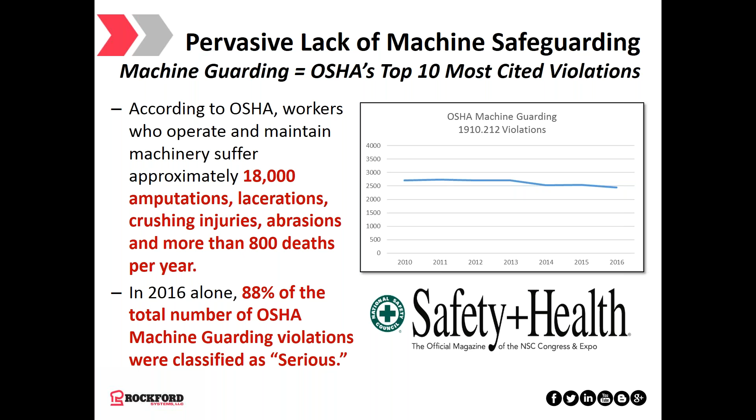In 2016 alone, 88% of the total number of OSHA machine guarding violations were classified as serious, meaning one in which there is a substantial probability that death or serious physical harm could result, and the employer knew or should have known of the hazard. So really, after a decade of dismal improvement, we need to make machine safety a higher priority. Having been on thousands of machine surveys, we estimate that an alarming 50% or more of metal fabricating machinery in the United States do not comply with the critical safety requirements for guarding outlined by OSHA and ANSI.

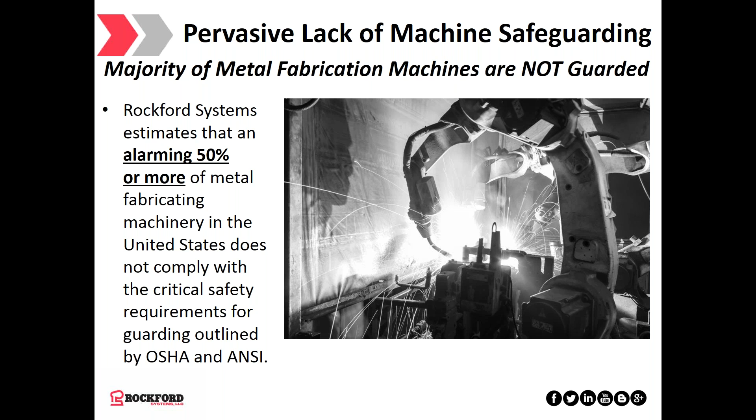So without further ado, I'm going to go ahead and turn this over to Roger Harrison, who will take you through the top 4 machine safeguarding myths. Thank you. Good morning. My name is Roger Harrison. I'm the Director of Training for Rockford Systems. So for the next 40 minutes or so, we're going to go look at the common myths on the subject of machine safeguarding with an emphasis on the regulatory side of things.

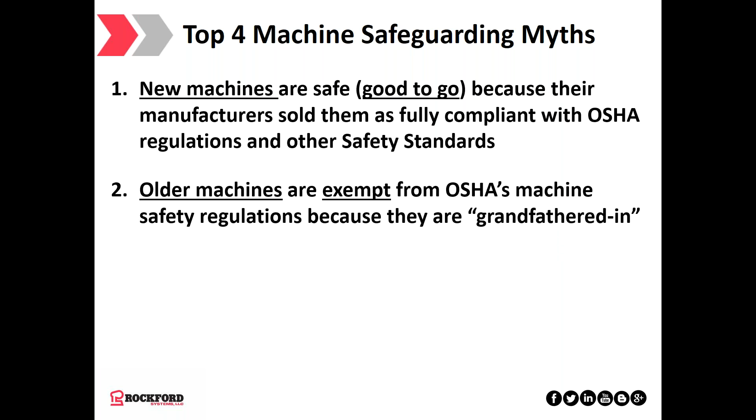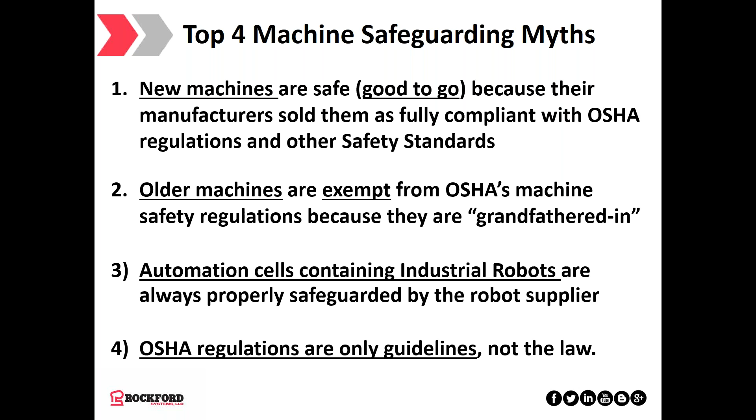Number 1, new myths. New machines are safe or good to go because their manufacturers sold them as fully compliant with OSHA regulations and other safety standards. Myth 2, older machines are exempt from OSHA's machine safety regulations because they're grandfathered in. 3, automation cells containing industrial robots are always properly safeguarded by the robot supplier. And 4, OSHA regulations are only guidelines, not the law.

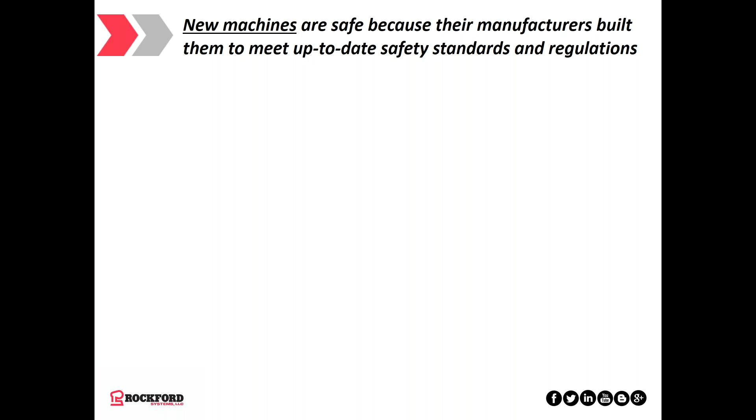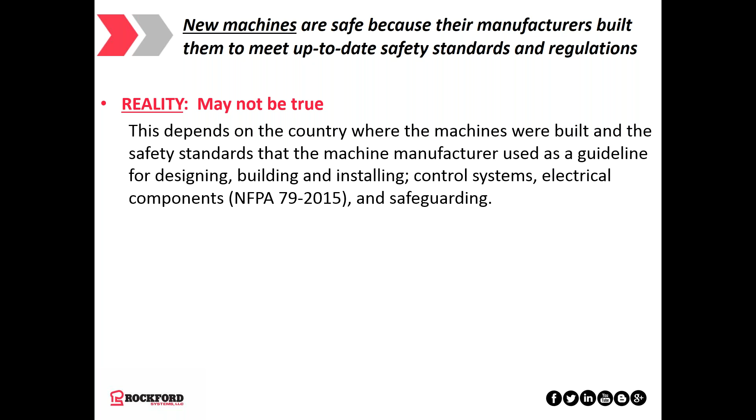So, Myth number one, new machines are safe because their manufacturers built them to meet up-to-date safety standards and regulations. Well, it depends on the country where the machines were built and the safety standards the machine manufacturer uses as a guideline for designing them, building them, installing them, and the control systems along with the electrical components. Keeping in mind NFPA 79, 2015, which is the electrical standard for industrial machinery, which does not get as much press as NFPA 70E that deals with the arc flash issues. Also depends on the machine's safeguarding expertise on the company supplying the machine, the OEM. Some are more comfortable with that than others. Two, the OEM's reluctance to add safeguards to the machine project's cost, because it does cost, whatever way you're going to safeguard it.

And three, the OEM's concern about liability of providing safeguarding, whether they want to do that or not. I heard one press manufacturer a few years ago say, well, we provide presses, and essentially a press is just a big powered hammer. It's a general purpose machine. A lot of different things you can do with the same machine depending on the tooling and the parts you're making.

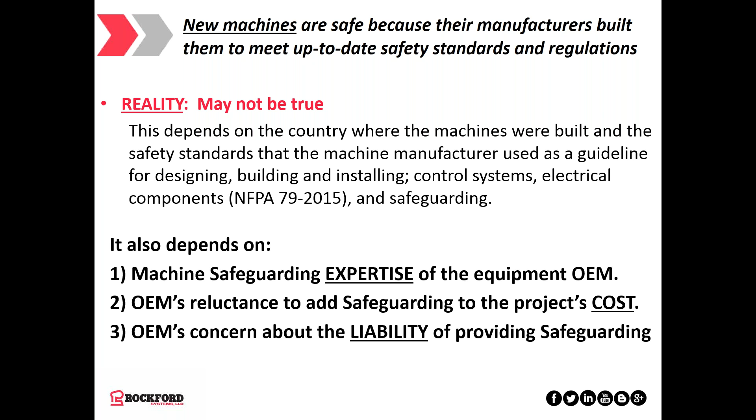So they hesitate to provide safeguarding for that reason. Now that's changing somewhat because Asian and European manufacturers of machines have for some time now provided their machines fully safeguarded. So American manufacturers look at theirs and say, well, we have to offer safeguarding at least as an option, if not a standard feature. So the attitudes are changing.

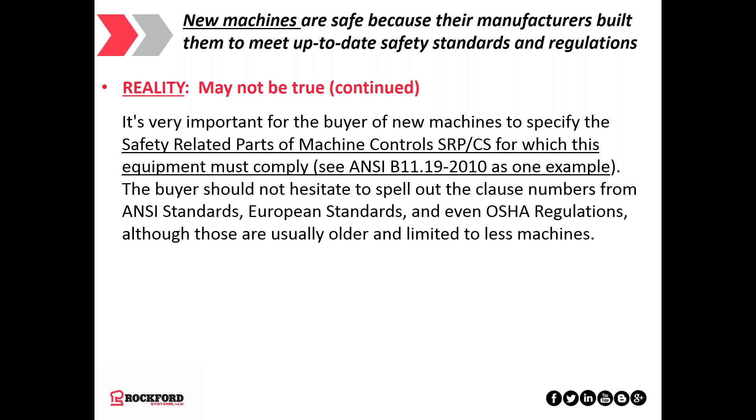It's important when you bid spec new machines to specify the safety-related parts of machine controls, abbreviated as SRP/CS, for which the equipment has to comply. One of those references would be ANSI B11.19 2010. Don't hesitate to spell out clause or paragraph numbers from these standards as opposed to just saying this machine has to meet all federal, state, local safety guidelines, blah, blah, blah. You really need to spell them out, and I think that's what a class like this will help you do.

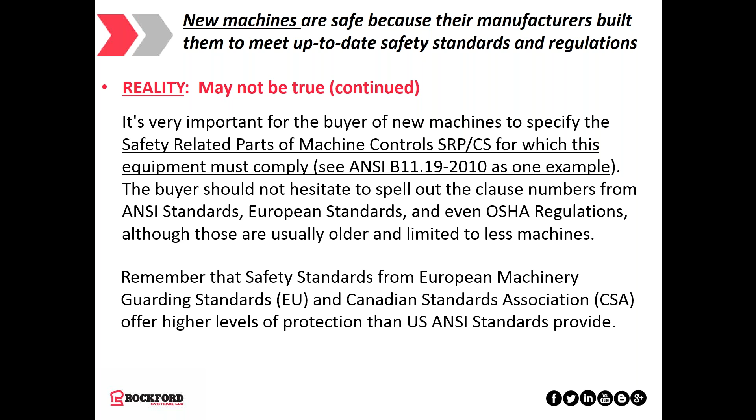Remember that safety standards from European Machine Guarding Standards, or EU standards, along with Canadian Standards Association, CSA, often offer higher levels of protection than U.S. ANSI standards do. So every time they update U.S. ANSI standards, they take more and more from the European machinery guarding standards to hopefully harmonize our standards to eventually meet theirs.

Here's an example of a new drill press that we needed to add some things to make it compliant with ANSI B11 on drills and mills, along with that electrical standard for industrial machinery I mentioned before.

Now you can see here at the top that we added a magnetic motor starter to give us dropout protection, also known as anti-restart. Well, what's that mean? If you lose power while the machine is running, 15, 20 minutes later the power comes back, you don't want any surprise restarts until you go back to the main motor start button. That's anti-restart. How do you know if your motor starter has that feature? Well, usually a spring-loaded start button indicates that, as opposed to a mechanical click that they had on older manual motor starters.

We've also added a red emergency stop button. Notice it's a red button with a yellow background and a manual latch feature, so when you push it down, it stays down. You've got to give it a quarter turn clockwise to reset it before you can go back to the regular machine controls, which in this case would be the on button, to restart it.

Second thing we've added to this is a shield to help control chips and coolant. So the shield actually supplements your personal protective equipment in directing the chips where you want them to go. This particular shield is electrically interlocked. You can see the interlock switch over on the left side here, so when you swing it out of the way, it either prevents or stops the motion of the machine.

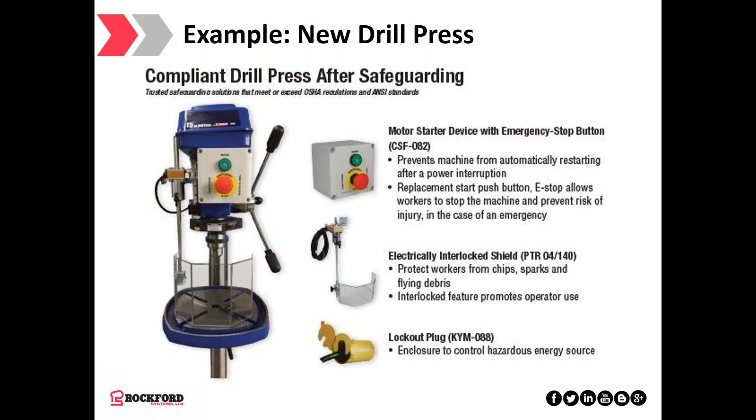We've done similar things here with this mill-drill combination as far as electrical requirements. And you'll notice the shield, this rounded curvature shield here, gives you a wider field of view, better visibility than smaller shields would do. It's also electrically interlocked. We've done some of the same electrical updates we discussed in the previous slide. You can see them over here. And the same thing goes with the lockout plug.

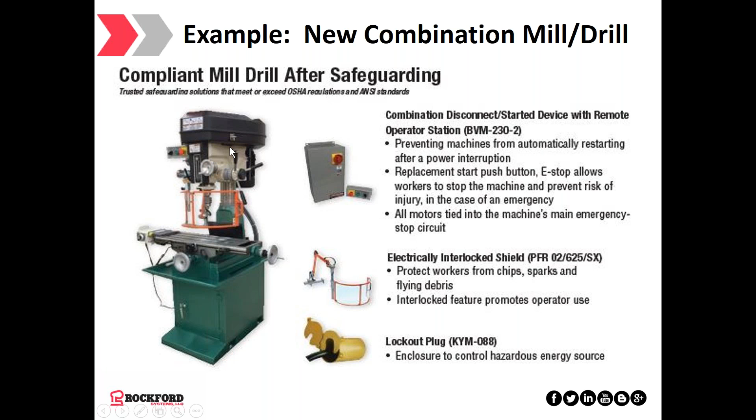Chip coolant hazards are addressed in OSHA's 1910-212, where they talk about flying chips and sparks as one of the recognized hazards you need to deal with.

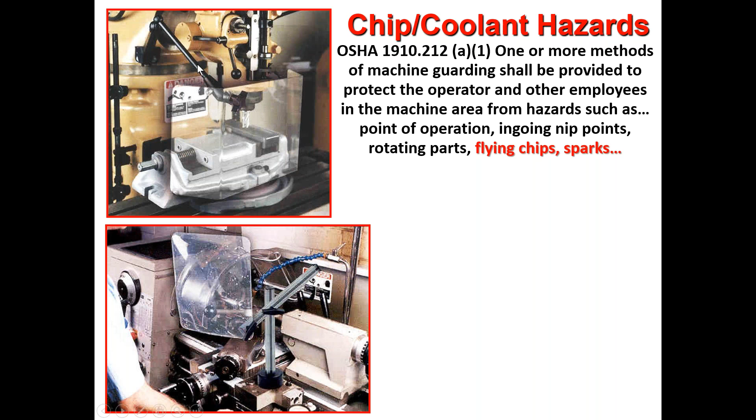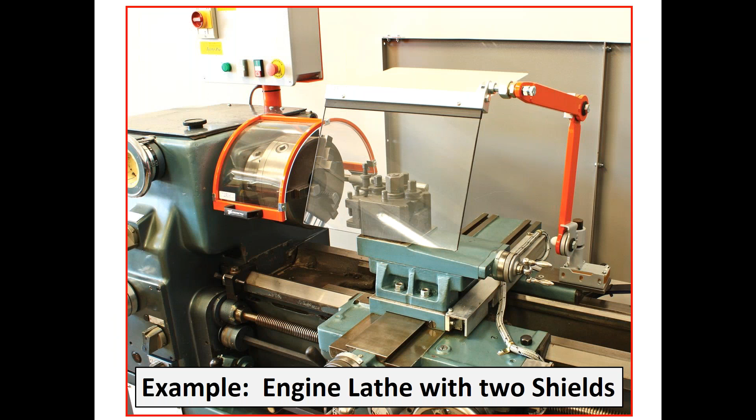Here's an engine lathe with two different shields. The one on the left is a chuck shield to prevent you from getting entangled in the rotating work holder, because remember, these machines have a lot of torque. So if you get wound up in these, they can create some pretty gruesome injuries. Even though that shield is not considered a guard, as we'll talk about later, it's really the most common thing you see on an engine lathe to prevent inadvertently coming in contact with that rotating chuck.

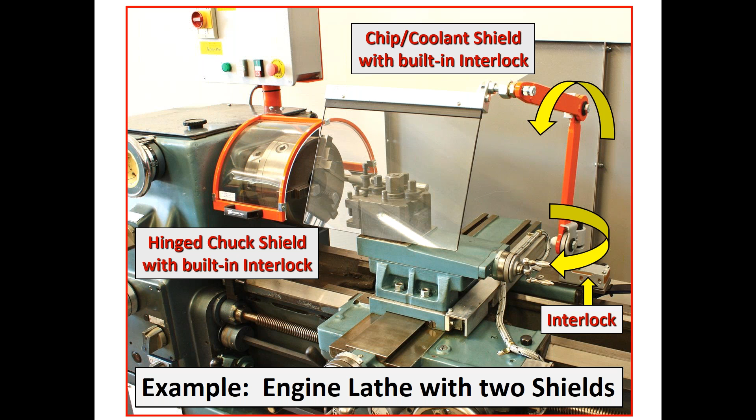It happens to be electrically interlocked, although that's not a requirement here in the U.S. to have an interlocked shield like it is an interlocked guard, which we'll talk about later. Over on the right-hand side, we've got a chip coolant shield, also with a built-in interlock, which has two different axes of movement, as you can see by the yellow arrows. These are actually European designs of shields, because they do include those interlock switches.

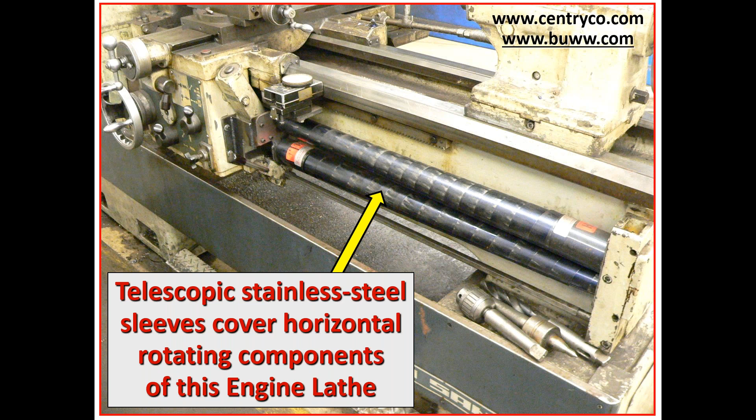Here we're looking at an engine lathe that's been updated with telescopic stainless steel sleeves to cover the horizontal rotating components like lead screw, feed rod, traverse rod, camshaft, etc.

These segments all collapse into the largest segment down on the right-hand side here, so you do lose a little bit of carriage travel. On this end, understanding there's a set of these on the other side that you can't see from this angle. So if that's a 4-inch length on that largest diameter, you're losing 4 inches on both directions. I suppose the reason some companies don't use these is that you lose some carriage travel, and you have to partially disassemble the machine to clean out these shields. So there are some maintenance issues with these, but the sleeves are definitely considered the best safety practice to prevent entanglement with those horizontal rotating components.

Let's look at a couple of stamping presses that we updated for the FabTech show in Las Vegas a couple of months ago. On the left, we've got a servo drive press, which is the newest technology for presses. And on the right, we have a straight side mechanical power press, which a lot of people refer to as a flywheel press. Someplace there up on top, there's a rotating flywheel.

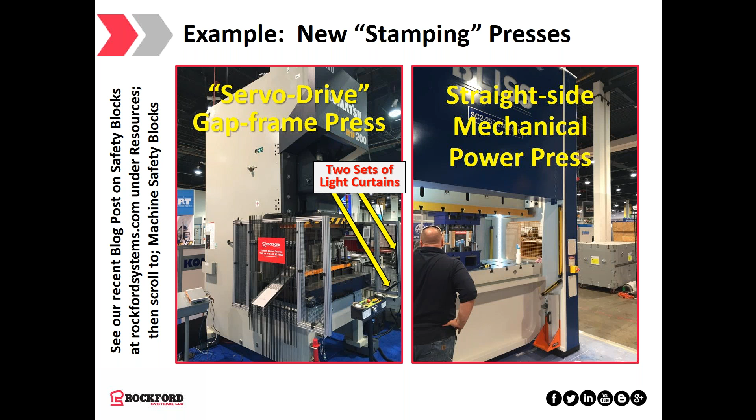For the gap frame press on the left, we've got two sets of light curtains, one vertical and one on an angle to keep somebody from standing in between the vertical light curtain and the machine. Then we've got a set of two-hand controls, which could be considered a safeguarding device if it meets the rules for two-hand controls. You're always better off with a two-hand control than a foot switch, because with a foot switch you don't know where the operator's hands are, whereas with a two-hand control you do. But there is a list of requirements to use a two-hand control as a safeguarding device.

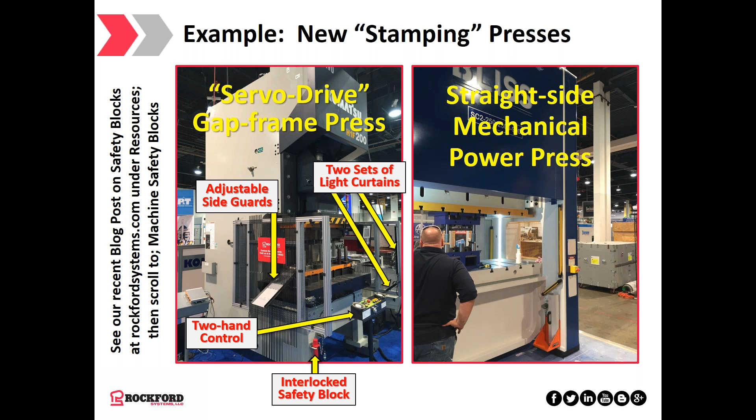Then we've got an adjustable side guard, which allows for different size scrap, presumably, to drop off the left side. And at the bottom, we've got an electrically interlocked safety block. By the way, you may want to see our blog post on safety blocks on our website under Resources, then scroll down to Machine Safety Blocks.

On the right side, we have 3 sets of light curtains we can see from this angle, and I think a 4th one, a little angular light curtain, is hiding underneath the other side. So that's fairly common, to use light curtains on a press this size. And again, we need an electrically interlocked safety block.

Anytime you are adjusting or repairing dies while they're in the press, you need a safety block to prop up the dead weight of the slide and the upper die if the brake or counterbalance should fail. That's the reason to use them. However, safety blocks will not hold back the driving force of the press, so you must have an electrical interlock circuit on these. Who says that? OSHA says you need the safety block, but ANSI says you need the interlock circuit, so that you have to pull the plug to remove the safety block from its holder and wait for the flywheel to coast down before you place it in the point of operation.

Now, while we have this slide up comparing servo drive presses to straight side mechanical power presses, it seems for now that OSHA is putting servo drive presses in the category of a mechanical power press, meaning they fall under 1910-217, meaning they have similar requirements to a mechanical press.

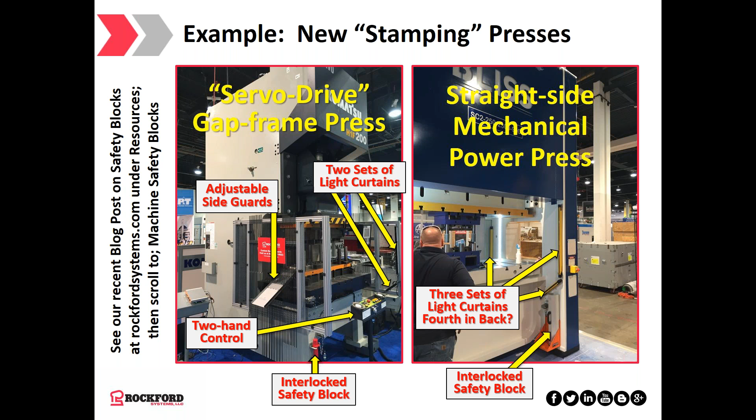Well, if you look at the definition of a servo press, they really don't have the same drive system as a mechanical power press. If you were to Google one of the press manufacturers for servo presses, like, for instance, Komatsu or AIDA, you get a full explanation of how those drive systems work.

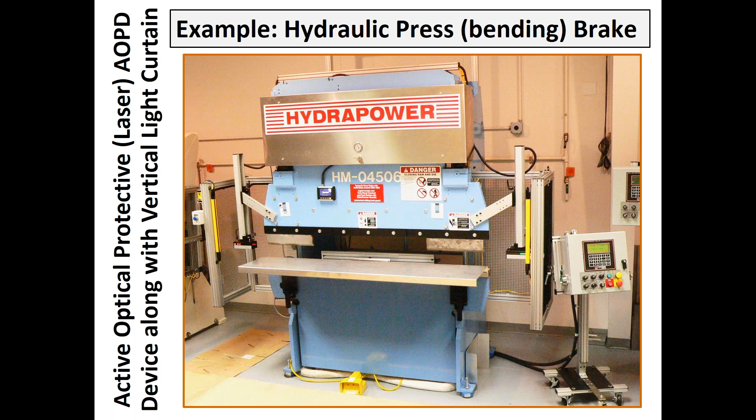Let's take a look at a hydraulic press brake. This is a down-acting machine, meaning the top half moves up and down, which is the most common design of the 42 manufacturers or so of press brakes that are out there.

Now, just one thing at a time, we've got an active optical protective device, also known as a laser device. It was invented around 2001, and if you Google that, you'll find 4 or 5 manufacturers of that type of device.

The nice thing about a laser device is that the operator can handhold the part up close to the die and still be protected, which is a very difficult thing to do with a light curtain because of blanking issues on the light curtain. Now, we do have a vertical light curtain on this machine in addition to the AOPD laser device. The reason for that is the laser device is not capable of handling all different types of dies used in the machine.

Like a compound die is something you can't deal with, as an example. Therefore, the light curtain acts as a backup safeguarding means to the laser device. Is it required to have both devices? No, it's just there as a backup.

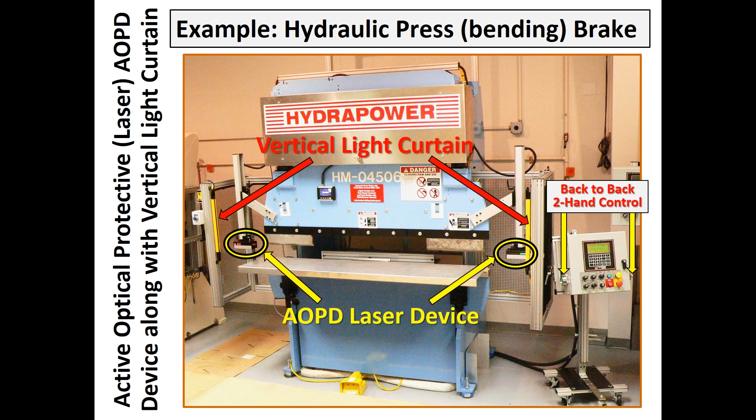Over on the right side, you can see a back-to-back two-hand control, which is something you might be able to use not only for cycle actuation, but as a safeguarding device if you're able to fixture the piece part in place, so the operator doesn't have to hand hold the part during the bend, which is normally what goes on.

Then you've got hinged corner guards, which you can swing out of the way so you can slide your tooling in from the end, which is what's normally required to do that. What you cannot see from this angle is a sliding interlocked vertical guard on the back side, which prevents people from getting in the back of the machine without opening up the interlock on the guard.

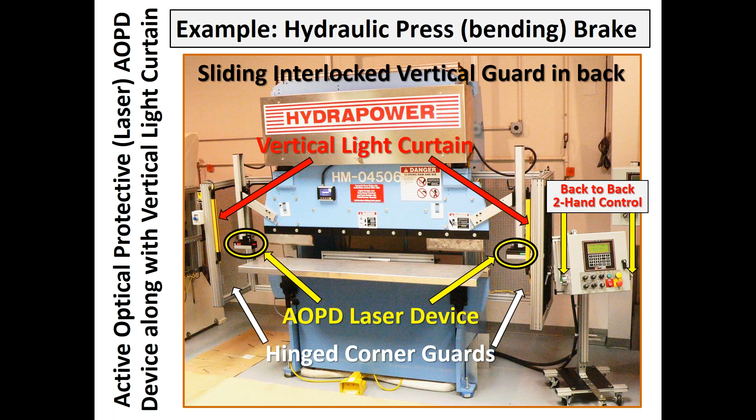So we have several different means of safeguarding on this hydraulic press brake. Keep in mind that laser device only applies to hydraulic press brakes, not mechanical. And there are still some mechanical press brakes out there which you can put certain safeguarding devices on, but a laser device is not one of them.

Now that we completed myth number 1, let's move on to myth number 2, which is that older machines are somehow grandfathered in since they were manufactured before the safety standards and regulations existed. Well, it's logical, but it's not true.

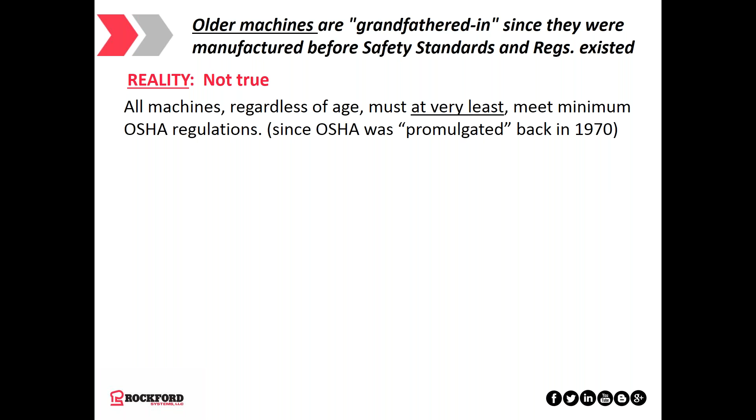All machines, regardless of age, must at very least meet minimum OSHA regulations, which were promulgated back in 1970, and unfortunately they've had very few changes since then. So if you want up to date, you're going to have to go beyond OSHA.

Every 5 years, the writing committees have to either rewrite the standard or reaffirm the standard, which is to accept that standard as is, no changes, if there hasn't been enough change in the technology or they can't get a writing committee together. Or the third option is to drop the standard or combine it with another similar standard, like they did about 20 years ago.

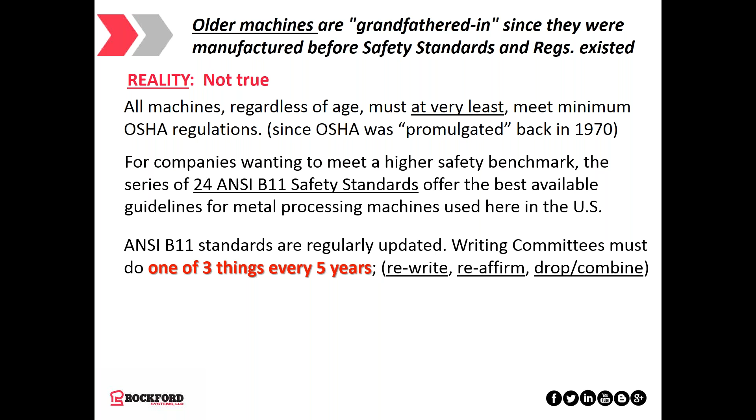With the coil slitting standard, B11.14, they combined that with the cut-to-length line standard, B11.18. Now they call it a coil processing ANSI standard, B11.18. So there's activity every 5 years, which there is not with OSHA regulations.

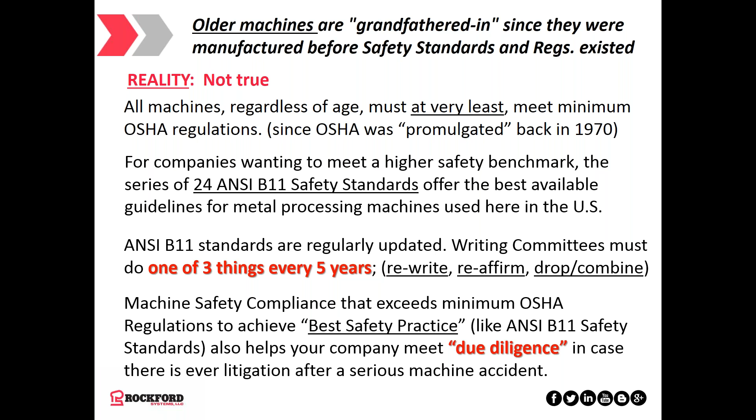So if you're exceeding minimum OSHA regulations to achieve the best safety practice, as is the case by using ANSI standards, it also helps your company meet due diligence in case there's ever litigation after a serious machine accident.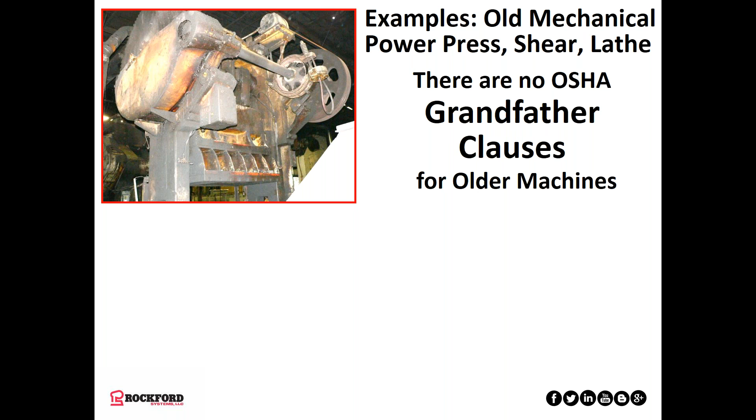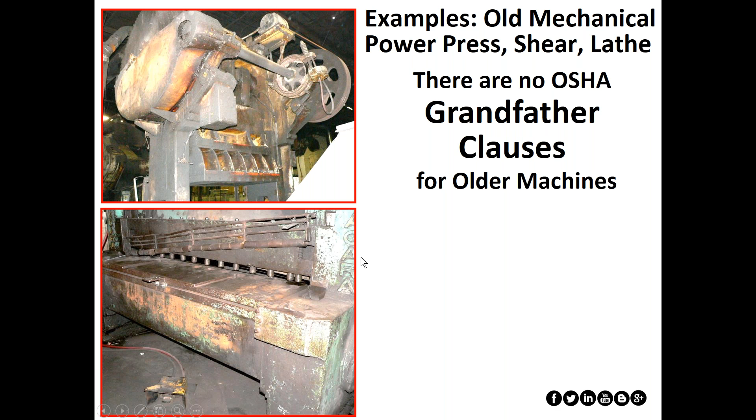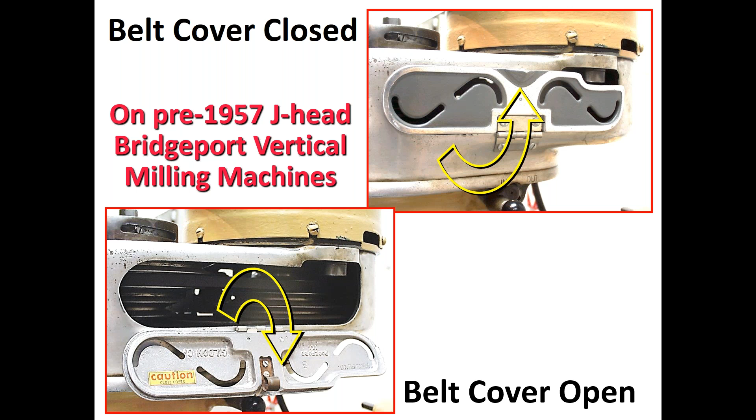Here we've got an old Bridgeport J-head machine, which they made up until 1957, and believe it or not, there's still a lot of these out there that have an opening on the top of the head to change the speed, because this was before variable speed drives. Somebody had to access the belts and pulleys to change the speeds. Well, that's a rotating component hazard under OSHA's 1910-219 and needs a cover.

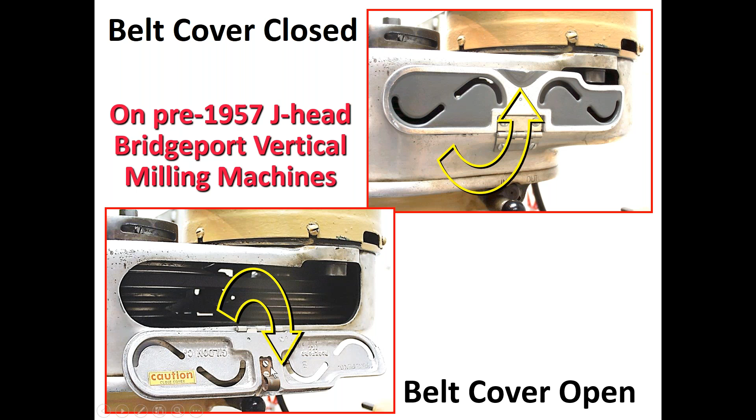And that cover needs to be held closed with a fastener that requires a tool, as opposed to just the spring clip that we've got here. So as you can see, this is custom sized for a Bridgeport. It has holes for heat dissipation, and there's a similar cover on the other side. But that opening does need to be covered.

Here's the second half of that list, and you notice the bottom item here, American National Standards Institute, Robotic Industries Association, R15.06 on robot safeguarding. There's a 99 version of that, which is still current, and the updated 2012 version. We're going to discuss more about that later, and I thought I ought to put them in here because later on we're going to see some examples.

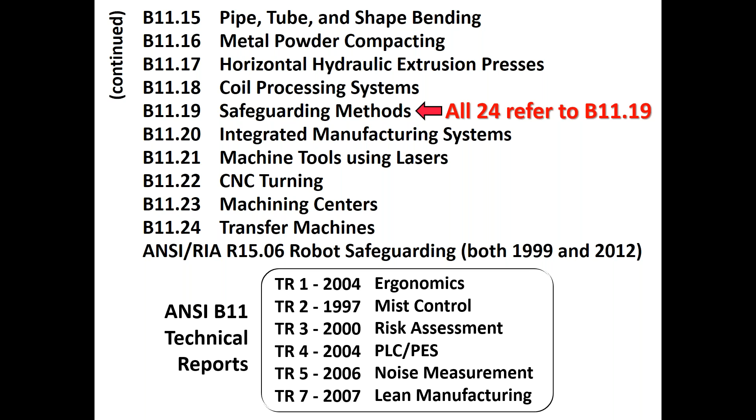There's also B11 technical reports that are published and available from the same sources you get the ANSI standards from, which, by the way, if you Google this, you could look at ansistore.org, techstreet.com, global.ihs.com, or roboticsonline.com for the robot standards. Most of these are around $85, although the robot standard, at least that latest one from 2012, is $325, just to give you an idea. Now, some of these sources offer these as paper copies, others offer PDF files, and some offer both, just to give you an idea.

How about a bench grinder? That's one of the machines that has a machine-specific regulation, meaning a list of do's and don'ts. It's considered a vertical regulation by OSHA, which they pay more attention to.

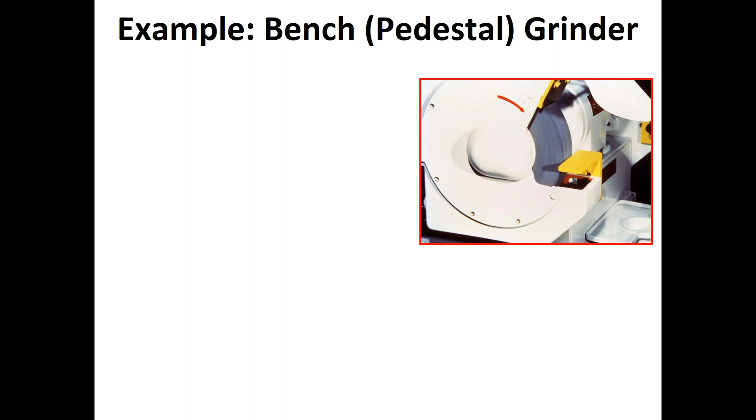What are some of the things you need to do for a bench or pedestal grinder? Well, first you want to ring test the wheel before you mount it to the machine. This needs to be documented, by the way, with the training requirements on that, which means you suspend the grinding wheel by the center hole, tap it around its outside diameter with a non-metallic object like a piece of hardwood to make sure the wheel will ring like a bell tone when you tap it, as opposed to a thud or cracked plate sound you'll get if you've got a cracked wheel, and you never want to mount a cracked wheel.

So ring testing is required by OSHA. They also suggest that you stand aside from that machine for at least a full minute, because if the grinding wheel were to shatter, it usually happens within the first minute. So that should be part of your safety training with grinders.

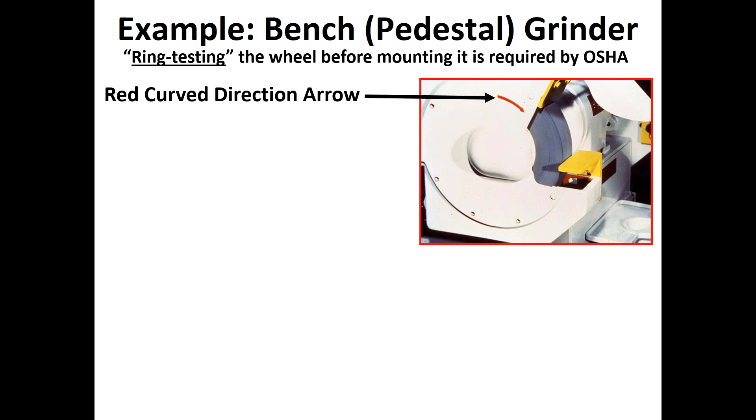The red curved direction arrow is usually for larger diameter grinding wheels, like maybe 18 inches or more in diameter, because those are usually used on larger machines that have three-phase power. If you should, during maintenance, disconnect the power, and then when the power is reconnected, accidentally reverse the phases in the motor, of course the grinding wheel would be running backwards, which is very dangerous.

So you need a direction arrow for the larger grinders and the larger wheels. Now the tongue guard, also known as the spark arrestor, can have no more than a 1/4 inch opening where that arrow shows you. You need to cover the wheel with something that also encloses the spindle end and nut.

Now what are you missing on this grinding wheel cover? The bolts. You got to have all the fasteners to maintain the strength and integrity of the grinder wheel cover.

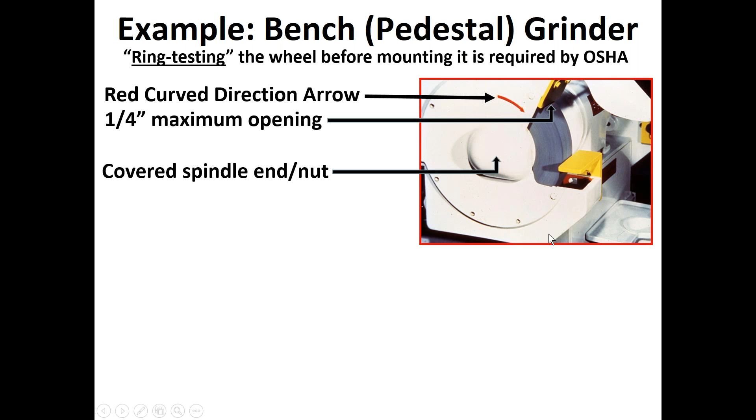So what's the big one with grinders? Well, that would be an 1/8 inch maximum opening between the work rest and the wheel, because the wheel wears down as you grind parts. That is the number 1 machine safeguarding OSHA violation, has been for 46 years since OSHA first came out.

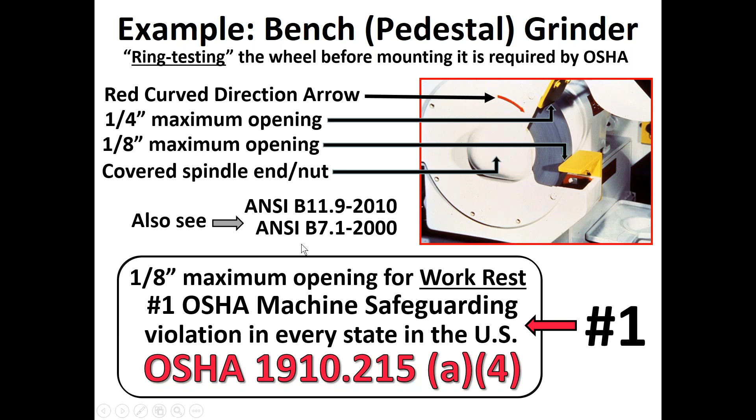So there's the paragraph within 1910.215 OSHA that tells you when you need to use that. And you'll notice there's also a couple of ANSI standards on abrasive wheels and grinders that are very current, and you may want to also access.

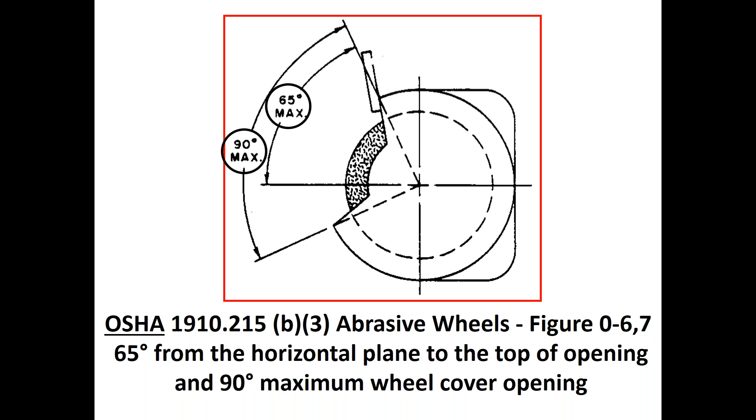By the way, as far as the wheel covers, you cannot cut away a wheel cover to any more than a 90-degree maximum opening. A 65-degree opening between the horizontal plane and the top is also in OSHA, under paragraph B3 if you need to look it up. So 90 maximum, 65 for the area that you're actually using.

I don't think I mentioned on the previous slide that the reason for not cutting open the wheel cover is, if you do - I saw one company that opened up the wheel cover to like 180 degrees - it gives you a wider spread of fragments should the grinding wheel shatter. And when you say shatter, that usually means explode. So that's why those are in OSHA.

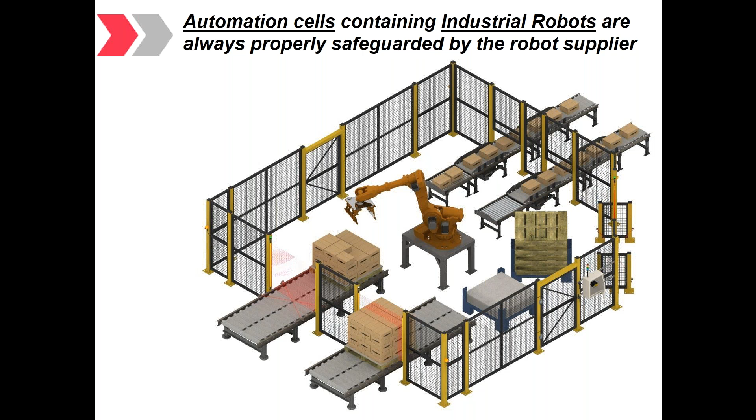So now that we're done with myth 2, let's move on to myth 3, where it says automation cells containing industrial robots are always properly safeguarded by the robot supplier. And sometimes that is true, but not always.

Some of the manufacturers of these machines are not comfortable with the safeguarding, as we mentioned before, so it's left to an aftermarket manufacturer to provide the safeguarding.

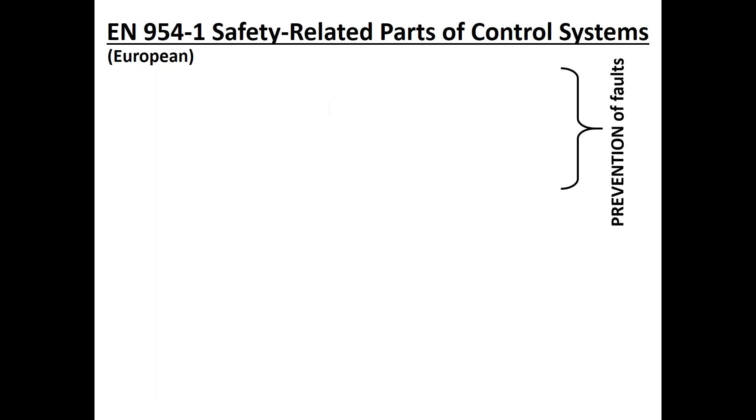Now, we need to consider the European safety-related parts of control systems when we get into this automation system. For the prevention of faults, there's two things: Category B, which are safety-related parts that will withstand the environment, and Category 1, which are well-tried safety components. So these are pretty basic.

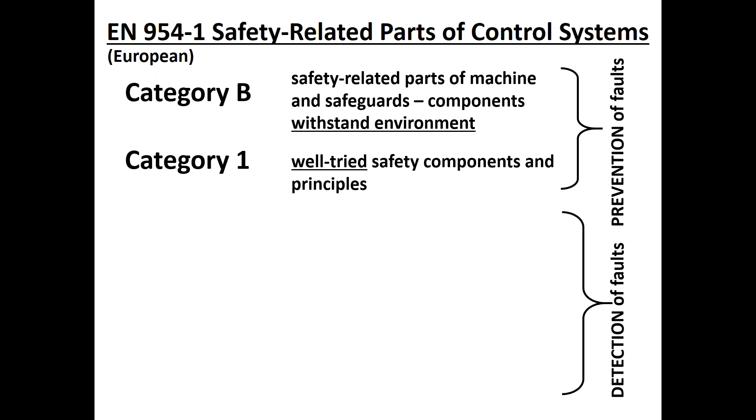Most of our concern would be for the detection of faults, like Category 2, components that are monitored before you start up and periodically thereafter, like, for instance, pressure-sensitive mats or drop probe devices, also known as ring drops or halo devices for spot welders and riveters. Radio frequency antenna would be another one for Category 2. That's a fairly low category of protection.

Your better guard interlock switches would be a Category 3 that are dual monitored, so a single fault doesn't lead to the loss of the safety function. And finally, Category 4 would be your better light curtains out there that are dual monitored with all foreseeable faults detected. So light curtains are not all the same.

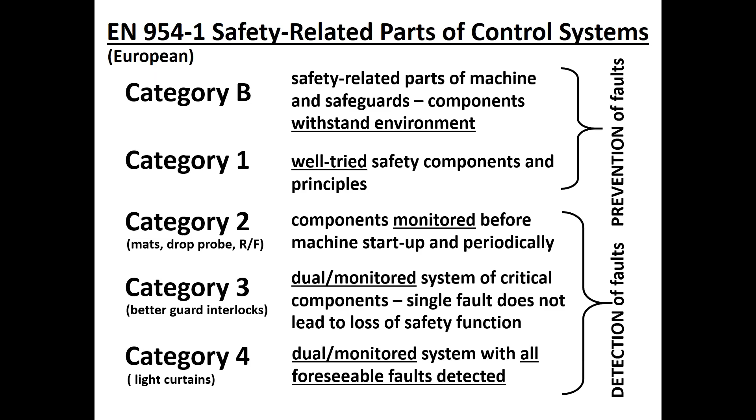If you Google light curtains, you want to make sure you're dealing with a Category 4 light curtain. If you Google guard interlock switches, you want to make sure you're dealing with at least a Category 3 switch. And again, these come from European regulations, but a lot of this has already been incorporated into updated ANSI standards over here.

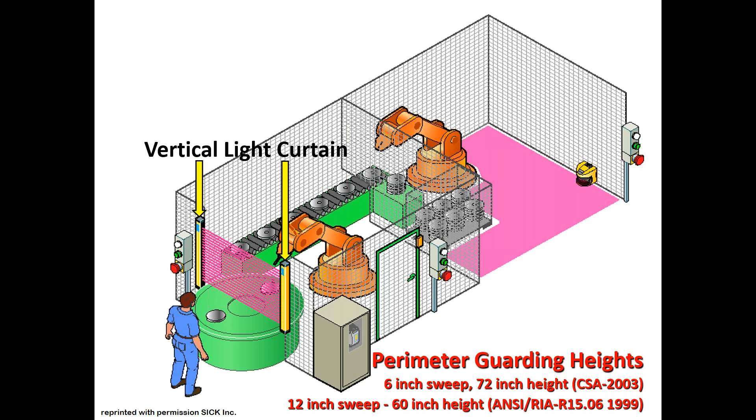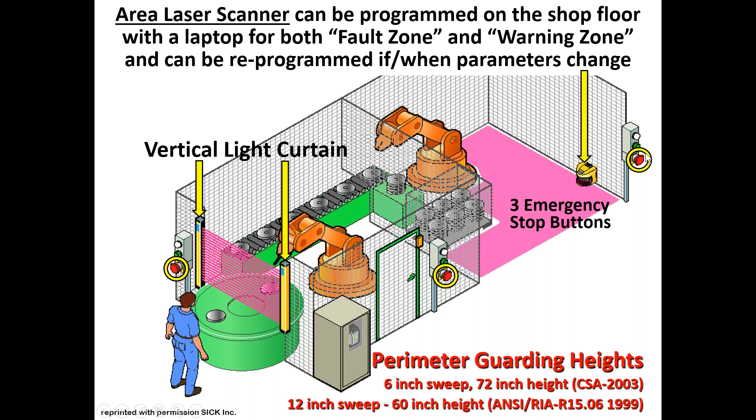We've got a vertical light curtain for the operator's turntable, as you can see. An area laser scanner, which you can program for the L shape that this is protecting, on a laptop computer out on the shop floor. You can reprogram it if your parameters change, which is the nice thing about that. I've got 3 red emergency stop buttons on the left, center, and right, and an interlocked guard door with an interlock switch, along with an output signal switching device. That means if this is running continuously like it's supposed to, because it's automated, and it suddenly stops, you need to know what to check, what tripped, why did the thing stop?

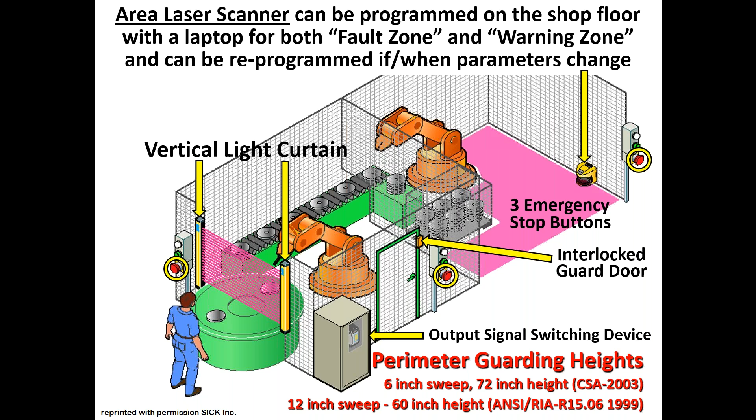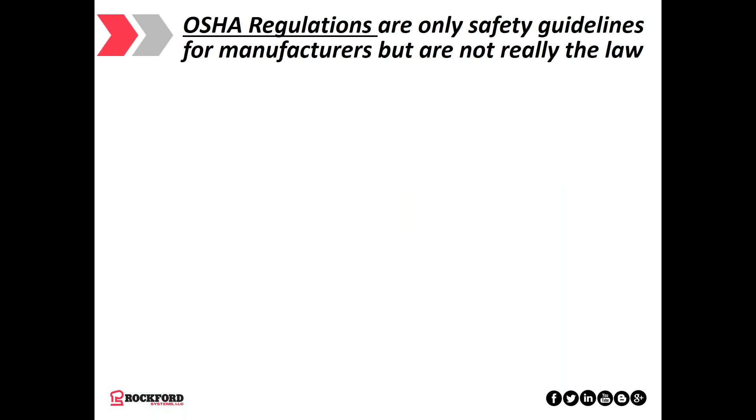That completes myth 3. Let's move on to myth number 4, where it says OSHA regulations are only safety guidelines for manufacturers, but not really the law. Well, no, that's not true.

Never has been. The Williams-Steiger Act, introduced by 2 congressmen from Wisconsin back in 1970, established OSHA. General Duty Clause 5A1 is the employer's responsibility for a safe and healthful workplace, and there's some other things we can take a look at there as well.

All 50 states started out under federal OSHA supervision. Through the years, about 23 states have petitioned to become a state-approved plan. So there's state OSHA plans and federal OSHA plans, but they pretty much go under the same rules.

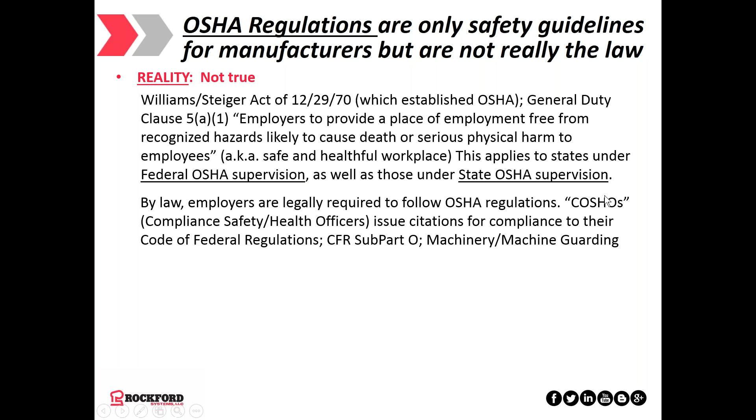So employers are required to follow the OSHA regulations. When they talk about COSHOs, that's compliance and safety and health officers. They'll issue citations if you don't follow the stuff in this CFR. 1910.212 says employers have got to protect the operator and anybody else in the machine area from exposure to recognized hazards using guards, devices, or methods, or some combination of those.

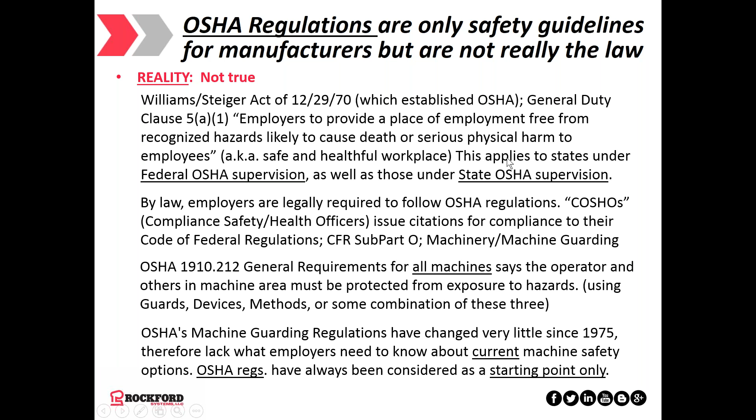Keep in mind, OSHA is well aware of the fact that their machine guarding regulations have changed very little since the 70s. Therefore, if you want to stay current, you've got to go with ANSI standards, because OSHA regulations just have so little that's up to date.

So if you're cited, the best place to go for advice is that B11 series of ANSI standards we've been talking about. Now, B11.19 is the Safeguarding Methods Standard, also known as the Safeguarding Criteria Standard. I think when they update it next year, it's going to have yet a different name that includes risk assessment. But this is where you find the 5 basic methods of safeguarding.

Guards, which could be either perimeter or point of operation guards. Devices, which could be light curtains, laser scanners, and so on. Safeguarding by distance usually involves a large, bulky part that the operator has to hand hold, which theoretically keeps him far enough away from the hazard to prevent him from getting hurt. Safeguarding by location would be the operator's physical location in regards to the hazard area.

And safe opening is currently a 1/4 inch or less. If you've got a machine that doesn't open up more than a 1/4 inch, that may be enough safeguarding because a small finger can't get in that opening. Well, it may or may not be true, because as I understand, they're changing that next year, getting rid of the 1/4 inch opening and just saying no body part can fit in that opening, without actually putting a dimension on it.

In the early years, the ANSI B11 standards had their own safeguarding section in each one, which meant you had to buy copies of all 25 different standards for the machines you wanted to look up safeguarding on. Now, in the B11.19-2010, the safeguarding sections for each of the standards were consolidated into this one umbrella standard, B11.19, for the user's convenience and to prevent them from having to buy all of the standards.

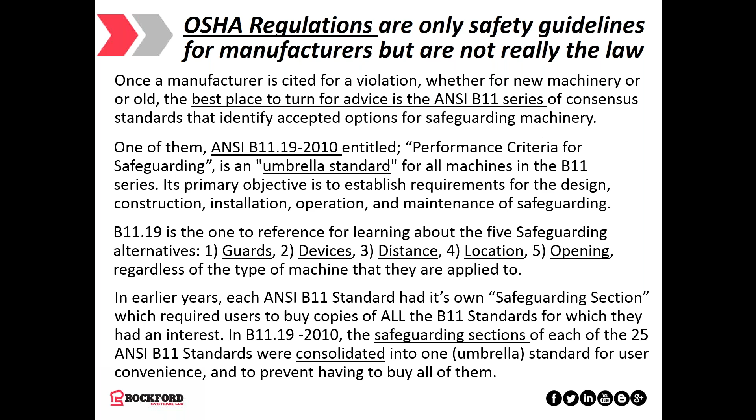So OSHA's 5A1, what's it say in the general duty clause? Employers got to furnish a place of employment free from recognized hazards likely to cause death or serious physical harm.

To operators, employees do have responsibilities here to follow the rules and regulations that apply to their own actions and conduct. I have heard of a couple instances where an employee was trained not to do something that was well documented, but continued to do it, even though it was a very dangerous thing to do.

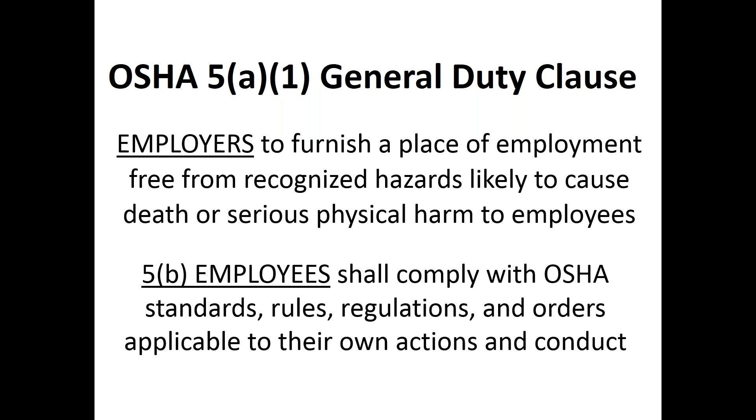Not only did that employee continue to do that himself, but trained another operator to do that same dangerous thing, and that second operator was seriously injured. So, as I understand, OSHA cited the first employee because they considered that egregious or serious enough to justify paragraph 5B, employee citations.

OSHA's 212 requirements under A1 says the employer's got to protect the operator and other employees in the machine area from exposure to hazards, like point of operation hazards, where the tooling comes together to make the part. That's the point of operation, which every machine has at least one. Ingoing nip points, rotating parts, flying chips and sparks.

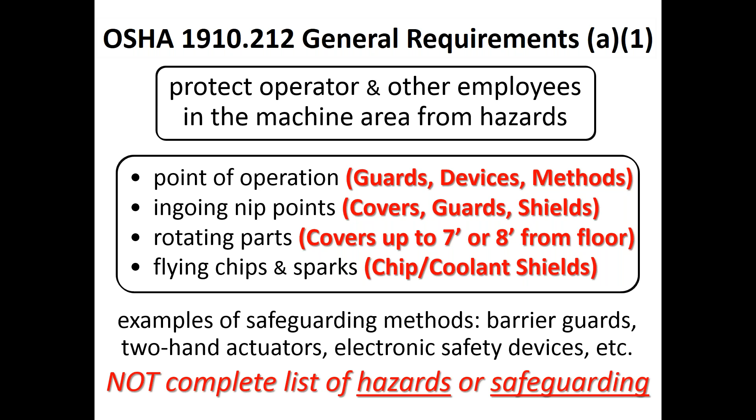So you've seen some examples that are listed over here on the side in red of the safeguarding methods that OSHA lists, but that's not a complete list by any means. That's just some examples from 212A1. So general requirements, 212A3ii says the guarding device should be in conformity with any appropriate standards.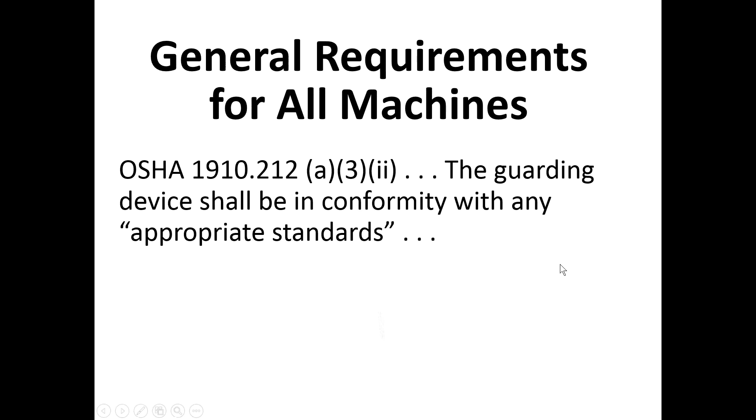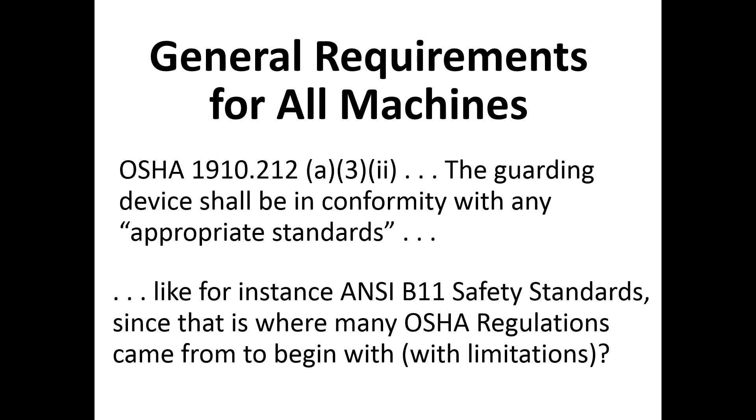Well, what could be more appropriate than the ANSI B11 standards from which these regulations came? There was a window of opportunity for OSHA back in the early 70s when they could take existing ANSI standards and adopt them into their own regulations and rebadge them as an OSHA regulation. But that was only for a few years. That method is no longer available to them, so now to promulgate a new, especially machine-specific or vertical OSHA regulation, it takes an act of Congress.

So, Subpart O, machinery and machine safeguarding. The 6 machines inside the box are considered vertical or machine-specific regulations. What's that mean? Got a list of do's and don'ts for each of them in OSHA.

So OSHA tends to lean towards these machine-specific regulations for citations. Look on the far left side here, you see the 3 arrows? Those are the three that seem to collect the most OSHA citations: 1910-213 for woodworking, 1910-215 for abrasive wheels or grinders, and 1910-217 for mechanical power presses, simply because there are a lot of those machines, I would expect.

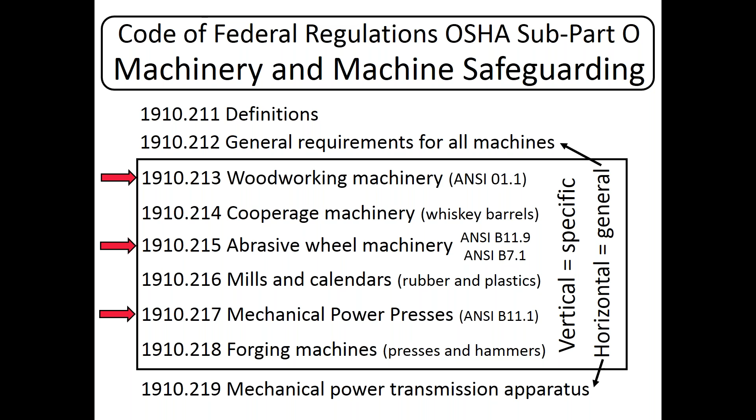The machines outside the box would be the 211 definitions, I think I mentioned that before. The general requirements, which we have defined, and 1910-219 down here at the bottom, talking about mechanical power transmission apparatus, so that rotating components like flywheels, gears, sprockets, chains need to be covered up to at least a 7-foot level from the floor to meet OSHA, or if you want to go best practice in the ANSI, an 8-foot level from the floor.

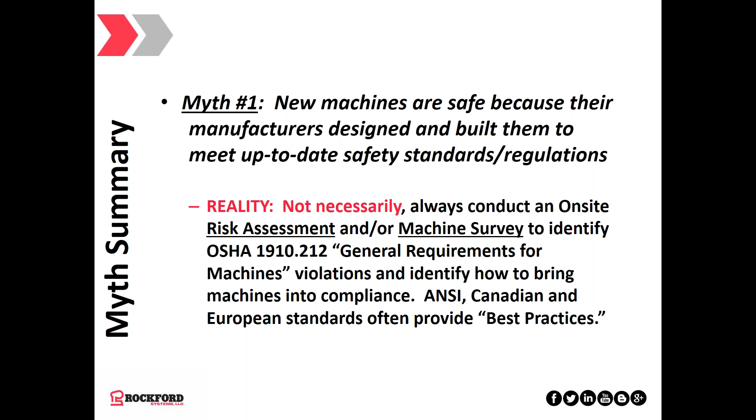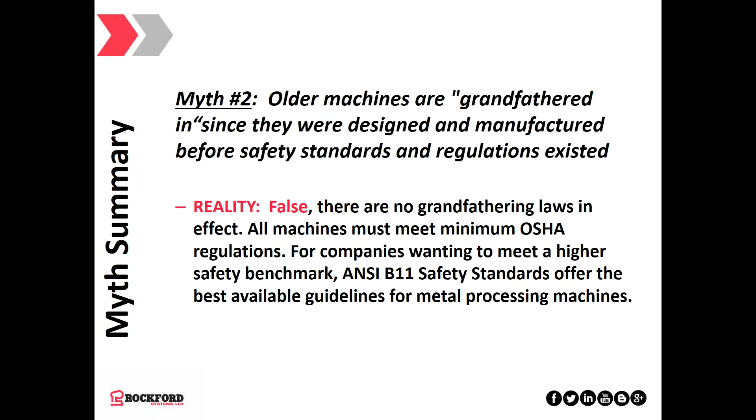So as a summary, myth one, new machines are safe because the manufacturers designed them that way? Not necessarily. You need to have a risk assessment and a machine survey to identify potential problems, whether they're OSHA things or ANSI issues. Older machines are grandfathered in? No, you've seen there are no grandfather clauses, so that takes care of myth number two.

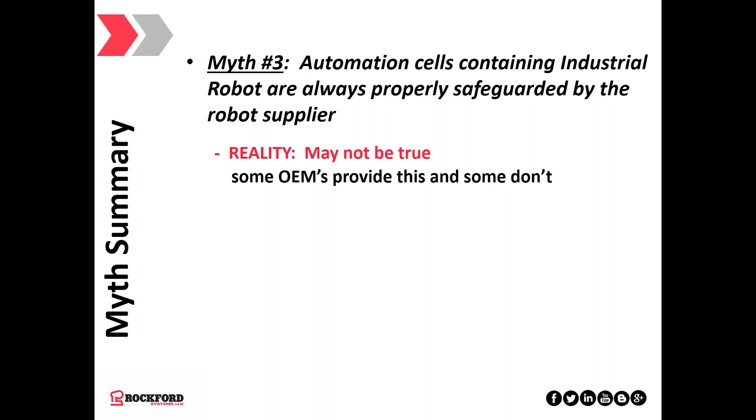Number three, automation cells containing industrial robots are not always properly safeguarded. We know that. Some are and some are not, but you got to make that very clear exactly what standards regulations that robot cell meets before you purchase it if you're buying the safeguarding from the OEM of the equipment.

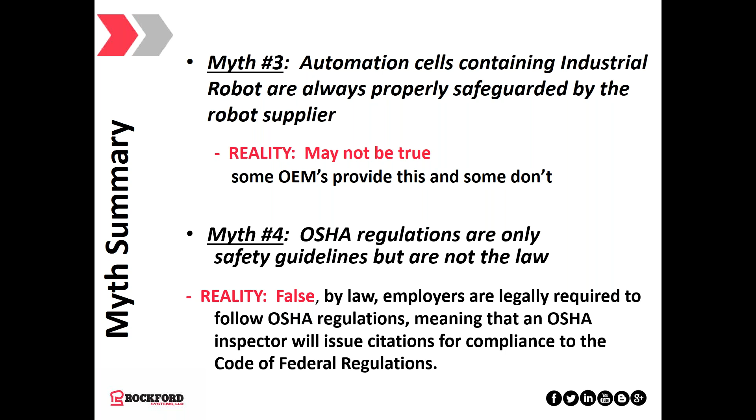Myth number four, OSHA regulations are only safety guidelines, not the law. Well, as we've said, they are. They've always been the law. It just depends on whether or not you have a federal OSHA state or if you have a state-approved plan.

Now, in 2 months, let's see, we're in April, we're going to have another webinar on comparing risk assessment to machine surveys. Now, with risk assessment, which is based on that risk assessment ANSI B11.0, that produces a hazard score and a risk level for each machine and offers suggestion to lower the hazard level, along with detailed documentation to outline the results. Whereas a machine survey based on what we just talked about, ANSI standards, OSHA regulations, each machine is audited for compliance to OSHA regs or ANSI standards.

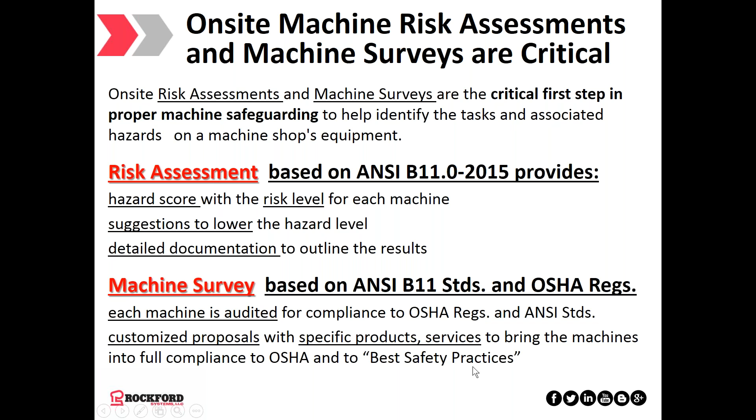And there are still some companies out there that have not brought their machines up to minimum OSHA. I'd say in most cases they have, so they do these machine surveys as an ANSI standard machine survey, in other words, up to best practice. Then you get a customized proposal with specific products and services to bring this up to best practice. So that's what we're going to do in early April for a webinar.

If you're not familiar, this is the risk scoring system that's used for what we do out there on a risk assessment.